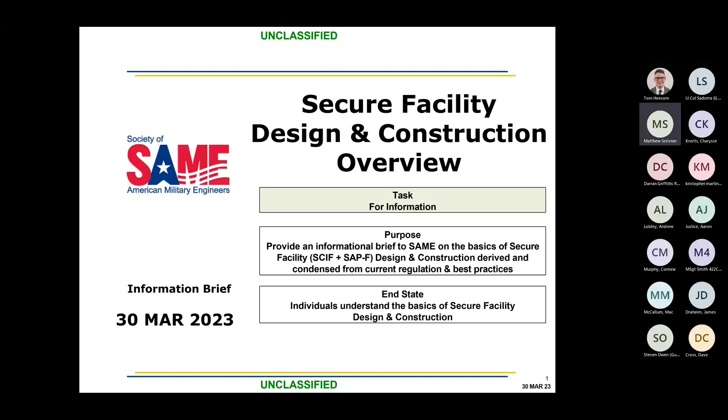My name is Rob Balcom. I'm the facility manager for 48 CES. I've had an involvement with these buildings over the last 5 years, so I have a fair understanding of them.

Danny Carter isn't able to join us today, but he is the Associate Security Manager with Lockheed Martin at the Sim Center here on RAF Lakenheath. He was able to contribute from the end user customer side.

I'm Stephen Helder. I'm the Regional Special Security Officer. I work here on base, but I'm the Regional SSO for all of USAFE in the UK AOR. I've got about 14 years of security specialist experience as a civilian, and I've been here on site for about 2.5 years.

Afternoon, my name is Darran Griffiths. I work in the 48th Fighter Wing Advanced Programs Office. I'm the Information Systems Security Lead. I've been doing this position for about 7 years, with 20 plus years of experience with builds and operations.

And my name is Matthew Scrivner. It's wishful thinking to say I'm still part of the wonderful 48 CES. I've currently moved to the Air Force Installation and Mission Support Command office on RAF Mildenhall. I just arrived there, and I've been doing military construction for the last 6 years.

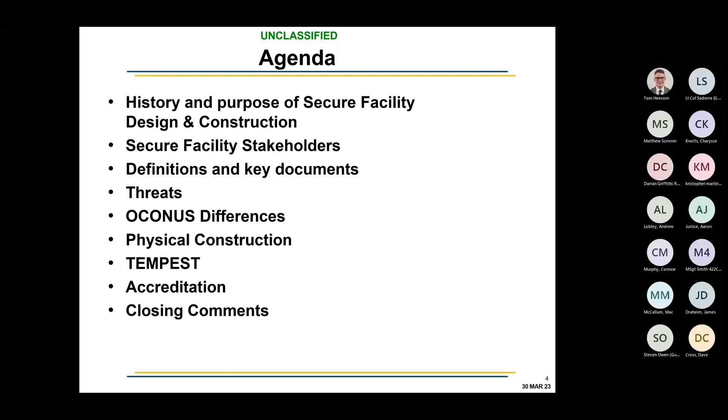I'm going to hand over to Darren.

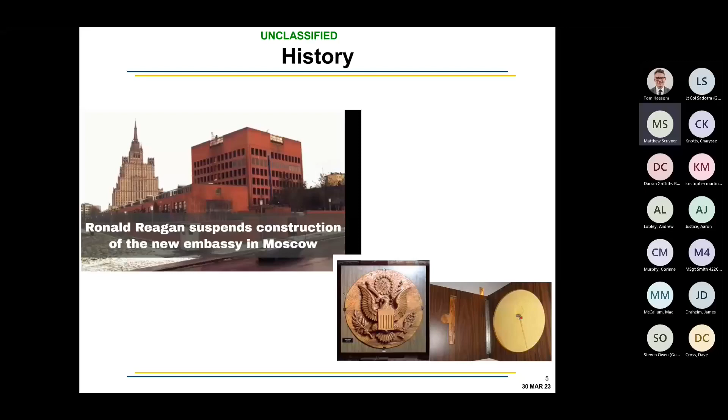I'm going to cover a couple of the stakeholders you'll typically deal with as far as the build and what you're trying to achieve with your facility. Starting with the accrediting official—that's your final authority for the accreditation. So when we talk about the end user and what we want out of a build to operate, that is what our accreditation is: the ability to process and store material and have those discussions at that facility.

During construction, the next person on the list is the Site Security Manager. They're responsible for all daily aspects of the construction site, including material, personnel, and processes for coming in and out of that site, and controlling the integrity of that facility.

Next on your list is the CTTA, or Certified TEMPEST Technical Authority. They specialize in emission security and TEMPEST aspects of the build—looking into the RF, beeps and squeaks of the facility, and making sure we're appropriately protected from that kind of threat.

Your Special Security Officer, SSO, in the SCI community, and your Government SAP Security Officer, GSSO, in the SAP community, is your government representative for whatever type of accreditation you're trying to achieve. They serve as the liaison between the AO and the SSM for day-to-day operations and mitigating concerns throughout the building.

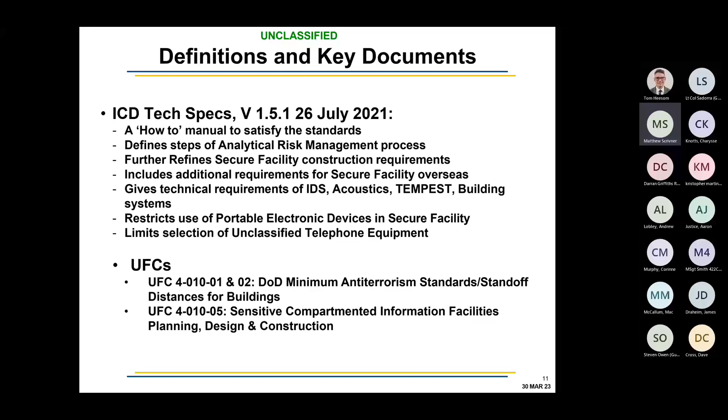So one of the key factors that we take into any type of facility is what kind of environment or what kind of threats are available in that area that we need to protect against.

Some of those things could be the physical compromise of the facility, how accessible is it to an individual trying to compromise material or the site, to include visual collection or theft of documents, eavesdropping, audio recordings, and technical collection and compromise. These are really the threats that are the most critical items to protection.

So we talked about the AO. That's what the AO is going to take on board. They're going to look at the environment that you're building it in. Are you in a high threat? Are you on a military installation? Are you in a shopping center where there's a lot of random people who can move around? And then what they're going to build into that is layers of security, or security in depth, as we refer to it.

And that is, how many areas can we protect prior to an adversary getting to that source, that document. That's one of the things that we always take into account.

So fortunately, most of the builds we have here in Europe, especially here in the UK, aren't necessarily the same as a US build, but there's a lot of similarities with those builds because the threat level is not as excessive as you'd see in some other areas.

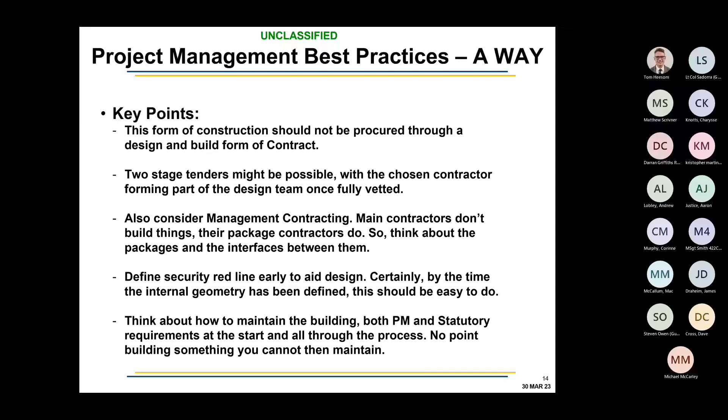Secondary point really - think, we've tried to convert buildings into SCIFs. They're highly complex things to start with, and if you're trying to convert one building into another type of building, think about it to start with. Invariably you come to the conclusion very early on that it was probably easier to build a brand new building to start with. These buildings can be constructed either in a heavyweight solution, concrete, which has its advantages, or a lightweight solution, which is steel framed and partitioned.

There are details, which I'm not going to go through every single one, but I'm sure Matt's going to send this handout out to the team that's viewing this. You'll see there are details for both - reinforced concrete and dry lining. Dry lining has its advantage, it's quicker to produce. Concrete has its advantages because it's intrinsically better for all your RF stuff, I think.

There's two ways you can do it. Standard details, if designed early, can all be vetted and approved with the client team, and then issued to the contractor. That's why at the start of this I said two-stage tenders - you can be designing and vetting your contractor at the same time, and that way you're covering two pieces of ground in parallel.

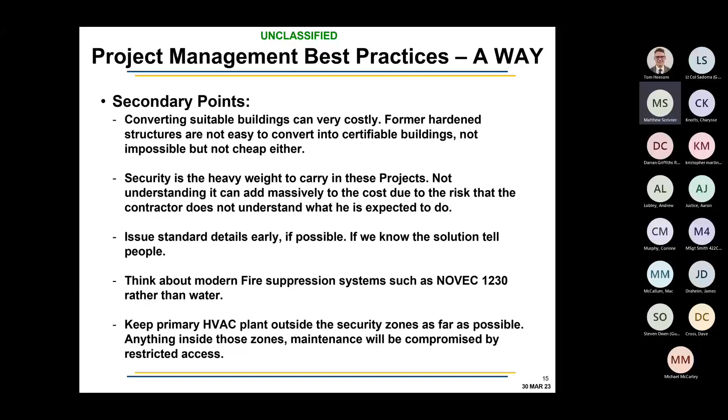Physical construction - there's a whole raft of pages in this document that will give you an idea of processes and detailing. I keep going back to this - they've all got to be ironed out almost before the contractor is even engaged with the process, so he knows what he's doing. Contractors have a nasty habit of pricing in risk on jobs. If you take the risk away and tell them what to do, they can't price it in.

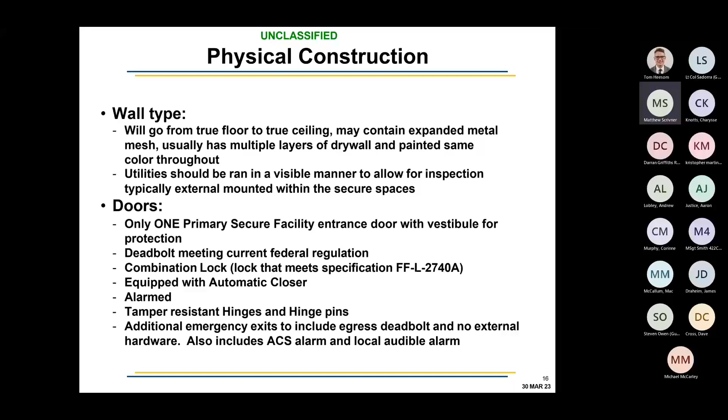Physical construction, dry lining, standard detailing - but always remember you've got an uncontrolled area and a controlled area, and that has to be understood right the way down to the guy actually doing the work. The detailing is the key to making this stuff work.

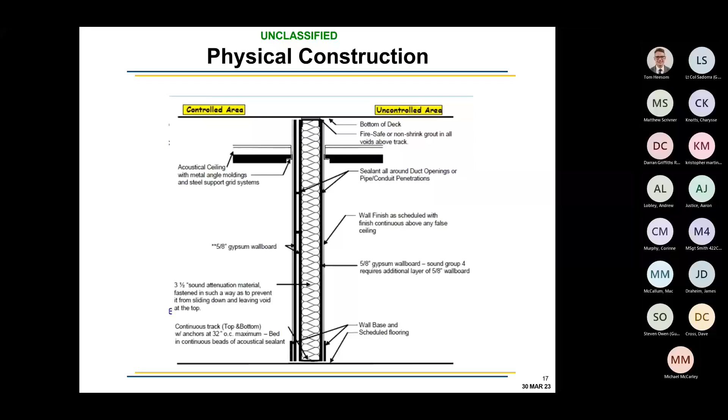If you go to the one with the physical construction, that's primarily what a SCIF looks like. Yeah, its nature is what you can see on that.

It's got to be inspectable. You've got to be able to see everything, inspect everything. Nothing can hide behind anything else. It's not buried in walls. The form fits the function fundamentally.

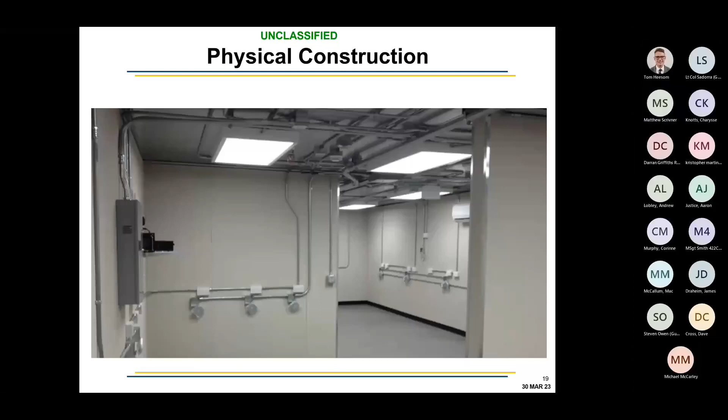Windows, as I said, they tend to be unfenestrated buildings. Yeah, they have no windows. They are secure.

This is an interesting one. You can go as Gucci as you like with security, yeah? Now we can get electro windows that darken, lighten. Of all the SCIFs I've built, all the SCIFs I've had detailed, not many of them have this in them. This looks more like Langley than most of the SCIFs I've ever produced. But it is an option. It absolutely is an option.

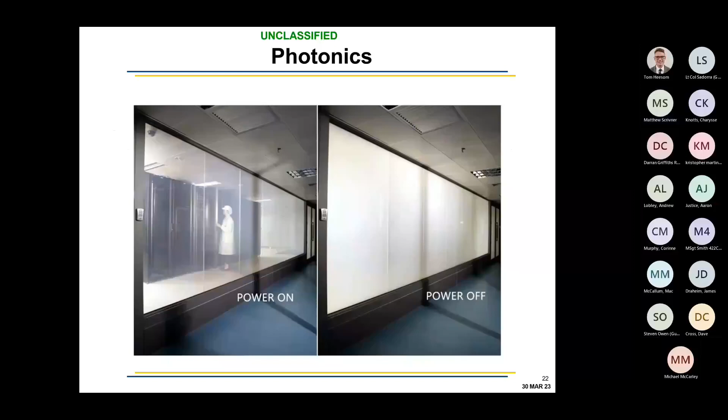Acoustics, very, very important. And again, knowing the secure lines and the levels of security, because the interesting thing about secure buildings is not all parts of that secure building are as secure as other parts. It's a layered approach right the way through the building.

So that's audible security, that's electro security, doors, dB ratings, crosstalk attenuation. All of this has to be detailed at the get-go, at the start, so everything is procured in the right way. And I haven't even touched on fire strategy yet.

Yeah, I won't bury myself too deeply in that one. But when you're talking about secure buildings, their fire strategy is something that gets detailed with all your apertures, all the doors. Yeah, they've got to be secure doors. They might have to be fire doors. They might have to have fire furniture on them, ironmongery on them, secure one side, operable from the other side.

I started this with a comment that I think these things ought to be designed up front, signed off up front, and then a contractor - whether in a two-stage tender sense or management contracting, I don't mind which way people go with this - but it's got to be that the design is ratified, agreed, signed off, and then issued, either as a pricing document or whatever.

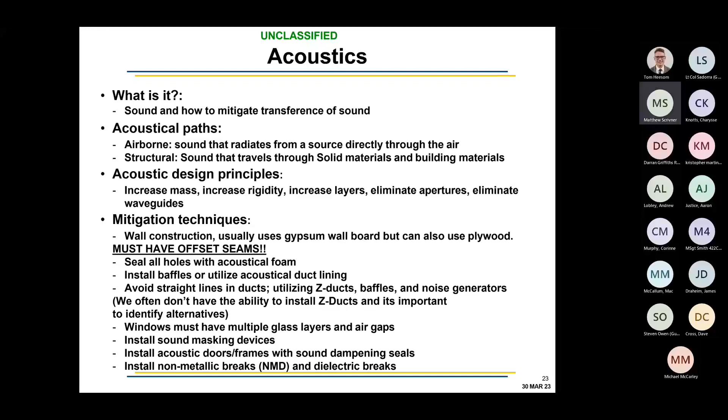Push me off, get me into Tempest. Get somebody else into Tempest.

Okay, tempest. What is it? So the word itself is kind of like the definition. It's a phenomenon. Most people think tempest is an acronym for something. It's just tempest.

Tempest is the study, investigation, and control of emanations. So things that we can't physically see, feel, or touch. That's what tempest is. All of our electronic equipment puts off these emanations, and the study of tempest is basically ensuring that those emanations are not transiting outside the secure space on things that we didn't intend for.

So this is normally like building infrastructure - something that's not intentional, that we wouldn't expect to go beyond the secure space. So any fire sprinkler systems, HVAC, any other type of comm lines or alarm lines that are copper can be carriers of emanations from our electronic equipment.

So the common mitigation techniques, there's two primarily, which is either a physical mitigation or electrical separation. So kind of the physical step is RF shielding.

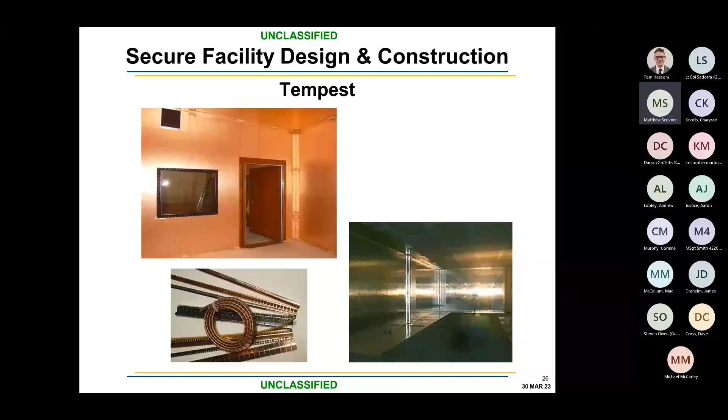So RF shielding is very specific, and there's a whole long policy on what it looks like to design and install RF shielding. The next page has a couple pictures of what it kind of looks like, but even down to the seams, everything has to be RF. Gaskets in the doors have to be RF. The seams and the taping, as soon as you start putting penetrations in the wall, it starts to bring into question the attenuation of the RF application.

So it's very specific. And I will say, recently they put up a policy, our accrediting official, to say that RF shielding was going to be required on all new facilities. So for us, this is like, and they said any modifications. So obviously that's a big deal from a cost perspective, and being overseas is kind of unique.

Because the next question is, well, who do we have that's going to apply this RF? Like, what type of vendors do we have? Are they going to say we need to have cleared contractors come and do that? Lots of questions to go with that. About a week later, I think they got enough questions from the field that they rescinded it.

But I think from my boss's perspective, and I think where it's heading is that any new construction, we are going to recommend that RF shielding is going to be part of it. What we don't want to have happen is build a new facility, and then a year down the road, they say, yep, all your existing accredited spaces must now have RF shielding, because I can't imagine how difficult it is to apply RF shielding on an existing facility.

I think part of that is, as our technology advances, so does the enemy, so does our adversaries. We're starting to use more things like wireless devices, so things emanate further than they used to, and also the adversary is capable of picking up these signals outside of our secure spaces. So that's what we're worried about with Tempest. Yes, we still have the rule of making sure we have man bars so people can't crawl into HVAC ducts. But I would say today we are more worried about someone outside the fence line on a computer with an antenna collecting signals from our devices.

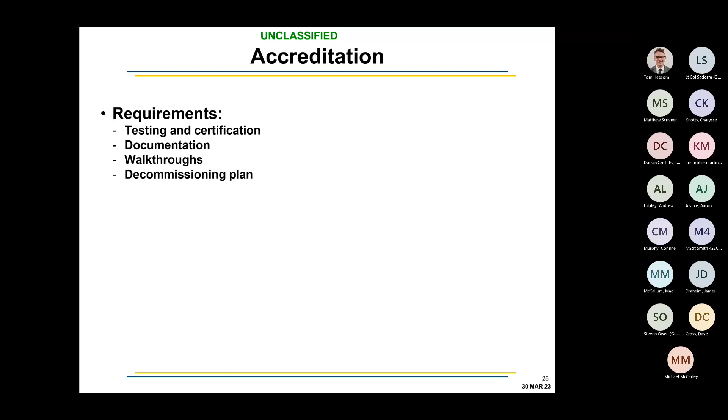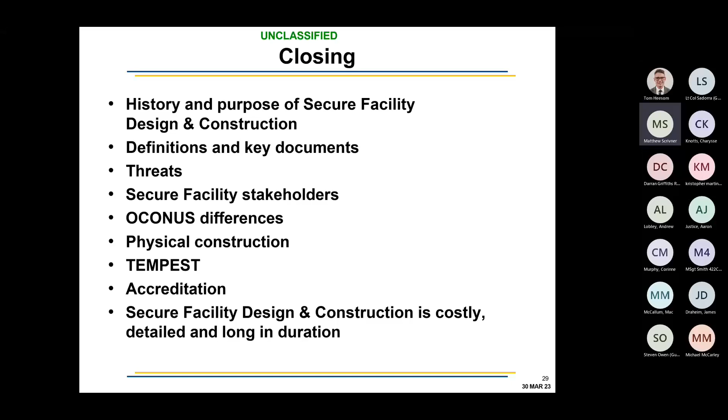I think I saw on one of the slides earlier, under secure facility stakeholders, it mentions U.S. contractors have to - or at least implied that U.S. contractors are the approved ones that have to construct these things. We want to clarify: do they not have to be a U.S. contractor, just cleared? And second, if they do have to be cleared and the work has to be executed through the lens of ICD with an AO and an SSO, does that mean we are not executing the work through DIO - defense infrastructure, our construction agent to get work done? So if we're doing it through a different mechanism to meet ICD standards, how do we ensure we're following UK MOD protocols for executing the work?

Someone could probably explain this better than I can, but DIO is involved in our construction projects. They still have a role, I think, that they're supposed to have in facility work. That is a good point.

ICD 705 does actually state that design and construction is supposed to be done with U.S. persons and U.S. companies. The caveat to that is all about how we write our construction security plan - that is the expectation, but we can use foreign nationals for design and construction, we just have to have additional countermeasures. That's all laid out in our construction security plan, which is why we do additional personnel vetting for foreign nationals and for the companies. Same thing with materials - materials are supposed to be U.S. materials, some things are supposed to be securely shipped, which is why we have a stringent inspection process for materials as well.